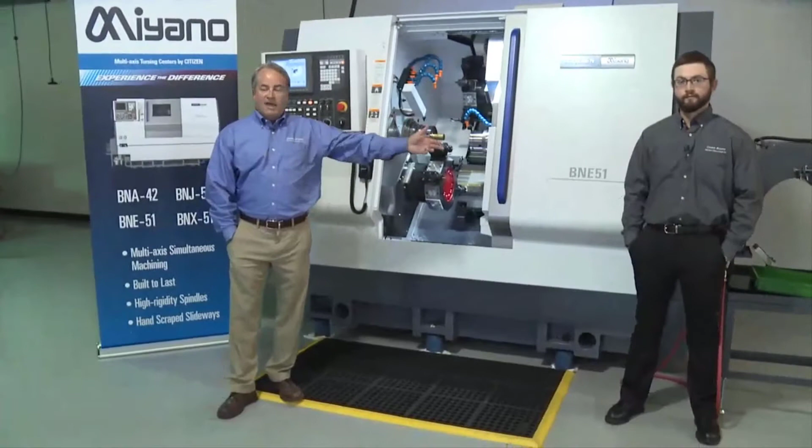Zach Hughes, I've been with the company for 23 years, started out in engineering and been in sales for the last 9. Zach is one of our Miyano applications engineers. So we'll be presenting Citizen Machinery's Miyano BNE 51 MSY.

Again, we want to thank you for taking the time to watch this presentation, and hopefully at the end you'll have a few questions. A little bit about how this presentation is going to go: I'm going to start out going over some design and construction and some of the specifications of the machine, and then I'm going to hand it over to Zach. He's going to get into a little bit more detail on capability and a few control features that we think sets us apart from others. And then after that, we'll actually show Zach's part running. It's actually going to be a narrated video, so we can hear him talk without hearing a machine cutting behind you, and then he'll narrate that as we go, and some other little narrated videos.

I'd like to start out by saying that Miyano has done a really good job of coming up with some unique designs, and many of those are around what we call superimposition. In this particular machine, it's a double turret machine, but it actually approaches the capability of a triple turret machine. That's due to the superimposition capability and some unique tool holders. John, if you can zoom in on this, you'll see a double turning holder. I can actually have 2 operations happening simultaneously with this particular tool holder in this turret. I can program this side to do its own turn, this side to do its own turn, but this side here will actually follow—the subspindle cutting will follow the movement of what's happening with the turret on the main side.

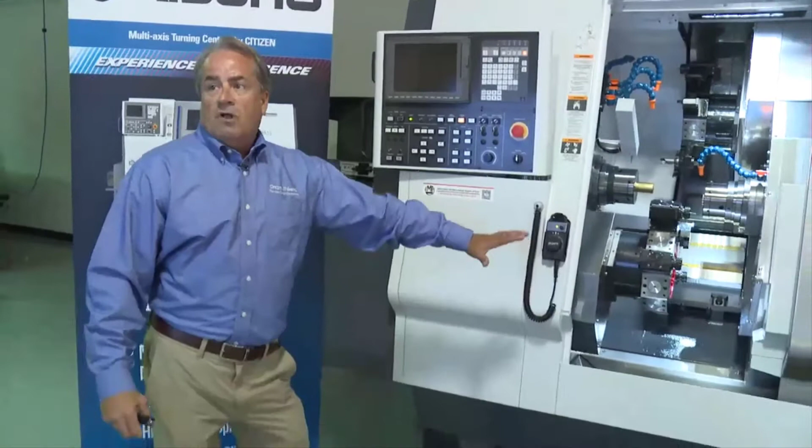So a little bit about the machine itself. It is a compact machine for a 2-inch machine. It basically weighs in at just under 18,000 pounds. And again, all the slides are all hand scraped ways.

The turrets themselves are all tang drive. So I've essentially got tang drive, meaning that if I turn on one tool, that's the only tool that rotates. It's not the whole turret.

On the turrets themselves, as far as live tools, I've got 6,000 RPM on the live tools standard, and we can add to that as well, with speeders and NSKs and that sort of thing. So there's many types of different tooling configurations on that.

Digging a little more into the turrets, or the machine design itself, I've actually got 3 coolant pumps on this machine. 2 of them are flood pumps, and 1 of them is a medium pressure pump that's 138 PSI. Now that we're on that, we can add our high pressure coolant systems, which are single filter or double filter—they'll automatically switch between filters while you're running, and those are capable of 1,000 PSI.

The turrets on these machines are capable of 1,000 PSI through the turret. Both spindles have C-axis, and it's a direct index of the C-axis, so I don't have to worry about slowing things down and it finding C. It'll automatically go to C0.

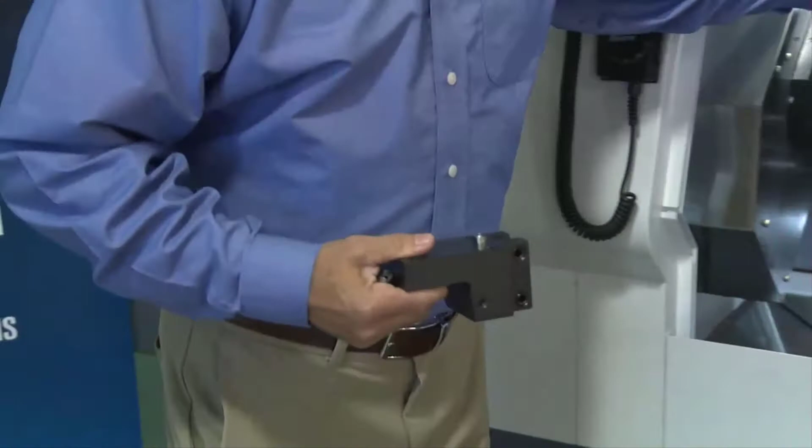One other thing I want to comment on as far as accuracy of the machine and just being able to change tool holders out, this is just a turning holder I've got in my hand, and the fit tolerance between these pins and these bores that these locate on are so tight that you can rely on being able to take the tool holder out, put it back in the machine, and not have to dial it in. It'll be there day in and day out. That's something that's been around on Miyano for years.

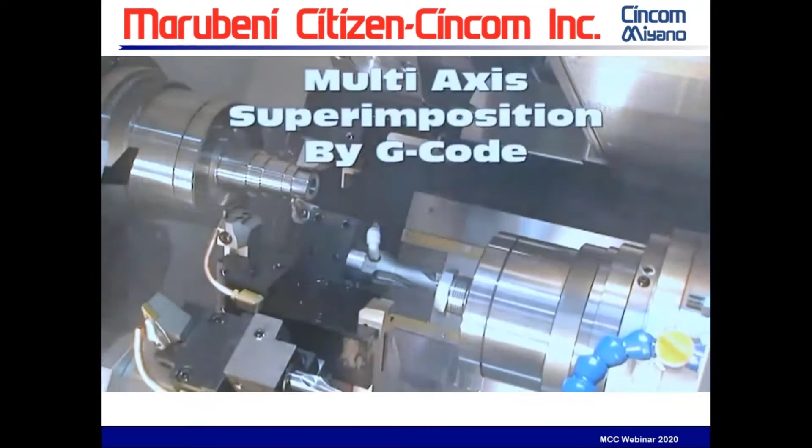So here we're going to be grooving on the main spindle. Right now the sub is just following, it's not doing anything. It's just getting ready to finish this face on the back side.

So we don't gain full triple turret capability, but a lot of times we can save quite a bit of time by finishing on the back side at the same time.

So here again, you're going to see us boring with the upper turret, finish turning on the main spindle with the lower turret, and finish boring on the ID with the back side of the lower turret on the sub spindle.

So here, this is really going to set us apart in the industry, is we're actually going to be turning on the upper turret or grooving, and then we're going to be threading on the main spindle with that turret, and on the back side we're going to be threading simultaneously. So the sub spindle is actually following the turret and keeping up with the threading cycle on the back side as it's independently threading on the main spindle.

So we're not just limited to superimposition with the lower turret, this is going to be showing superimposition with the upper turret at the same time. So now the upper turret is going to be drilling on the main spindle, it's going to be turning on the sub spindle, and then the lower turret is going to be doing its own thing as it's turning on the main spindle.

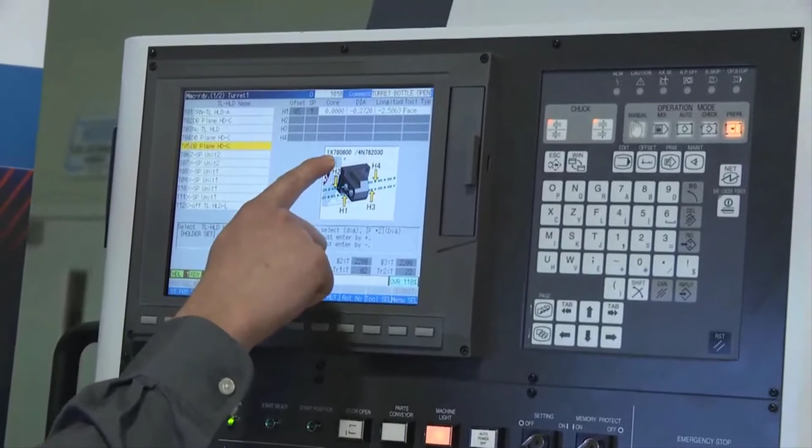So this is actually our holder set page, where we define the holders. This allows us to just call up the holder, and every holder is serialized if you're confused on which serial number there is. It's actually engraved in the side of the holder if it's from Miyano.

So here we can call up the holder, and for the diameter, normally on most machines you have to put in a dimension from the turret to the center line of the holder. This actually wastes a lot of time. Normally people have that number written down, but you still have to put the information in.

Instead, we can just call the holder up, and when this is 0, that means this pocket is on center line to the main spindle. So that makes it very easy. It's just kind of an ease-of-use thing.

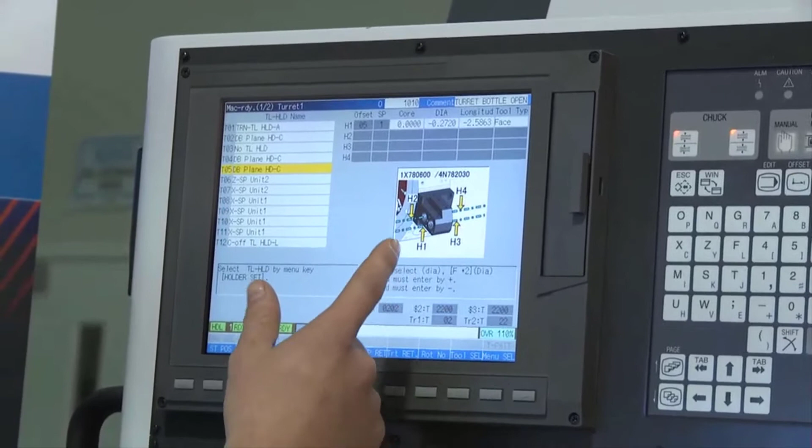This actually has a number in it because that's a boring bar. So in a boring bar, we can just put the F dimension in, the dimension from center line to the tip, and then we're pretty much ready to go. There's really no touching off in diameter here. Then we just have to touch longitude off, which is Z, and that makes it very easy and quick for setup and touching tools off.

So all this information is actually saved in the program in the end. Instead of saving it just here and having to change it every time, we save it back to the program, and this is all output with one program.

So when we want to reload this job, for example, if we have an obligation like 10,000 parts a year, and we don't want to run all those parts at once, we just want to fill in when we're not busy, if you have the resources, you can take those holders, put them aside on a cart, and do other jobs in between that you need to get done. Then when you're slow and want to run that job again, all you need to do is bolt the holders in, put the pads in, and then recall the program.

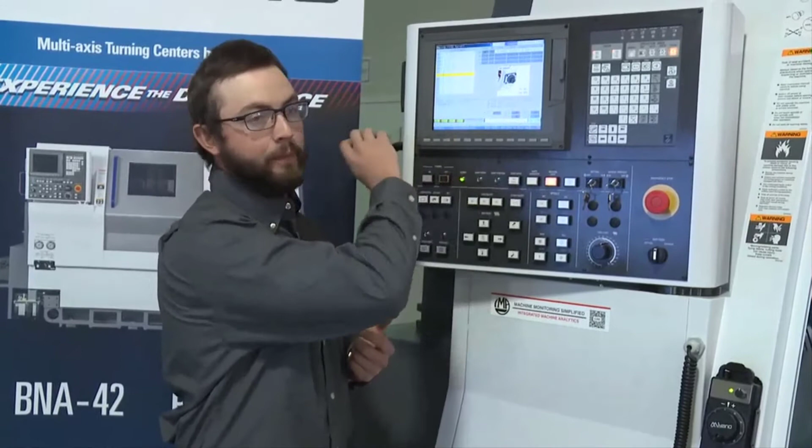It's going to ask you, do you want to load this information back into the machine? When you hit yes, it pulls all the information from your program and puts it back into the machine, and you're basically ready to go. You don't have to touch anything off. There's no messing around with it. You may have to change a couple offsets, but that's after you run the first part. So it's pretty easy, and our changeover time is very, very low when you do something like that.

So a couple features here. We have a check mode. Auto mode is for running automatically, and check mode is for when we're setting up. There's a couple extra features we get here in check mode.

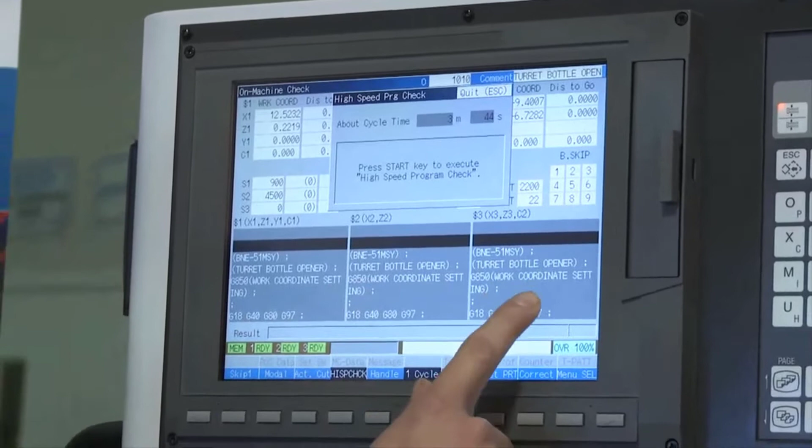One of them is high-speed check. So say you want to get a cycle time for the part for a customer, you can write the program in here and do high-speed check. This checks two things: it makes sure there are no errors in the program, and it gives you a cycle time. When we hit high-speed check and hit cycle start, the machine runs through the program. It's not actually moving, but it's running through to make sure there are no errors, very quickly. In the end, it gives us a cycle time, which is pretty accurate within about 10%.

So this is definitely a time saver. It makes it very easy and reduces the errors in the program as you go.

There's also another nice feature when you actually go to prove it out. We have this handle mode. What handle mode allows us to do is once we turn it on and hit cycle start, the machine is going to start to run. We can go over to our handle and actually go forward. The second that I stop, this is running through the program, but when I stop, the machine stops.

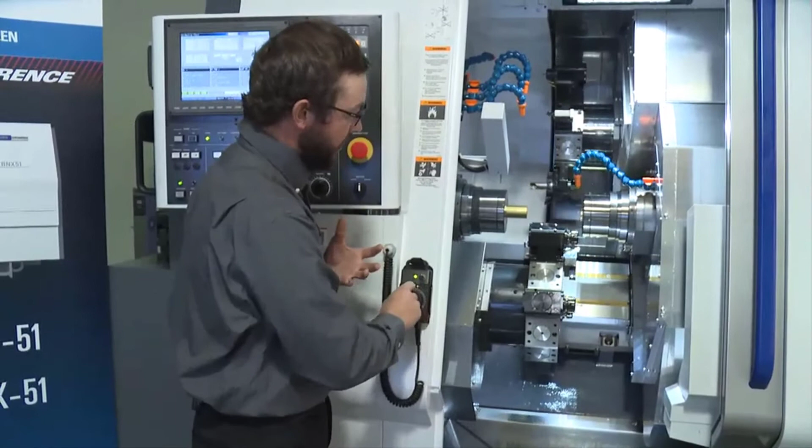So we can continue to run, and everything's going to start. It's going to go down like it's going to machine. Say that it was too close and I wanted to go back a little bit, I can go back to an extent, so I can actually go backwards a little and rewind. Then I can go down and start to machine. This is very easy, and it makes it very easy to set up and prove out a part.

So some of the things I want to talk about is MC data. MC data allows us to save the information of the part in here - bar stock diameter, how far we want the part sticking out of the main spindle, how far it is out the sub. So we actually don't have to use a G54/56. The machine actually knows where the part is in the machine at all times, and again, this is saved in the program.

So if you notice in the video, when our tool changes, when it goes to do a tool change, both the sub spindle backs up just far enough, and then the turret backs up far enough so that we can change tools right off the part, because it knows the longest tool in the turret, so it can instantly rotate and clear the part and not hit anything. So our chip-to-chip time is almost nothing on this machine. It's very, very limited, and that's another thing that really sets us apart.

So I kind of hit on all the details of the machine. We're going to jump to questions and answers, and I'm actually going to bring Les back into this for that.

So Zach, we've got a question. Somebody's asking whether or not the top turret has the Y-axis on it. That is the only turret that has the Y-axis on this machine, and I've got 80 millimeters, or 3.2 inches, worth of stroke on that Y-axis.

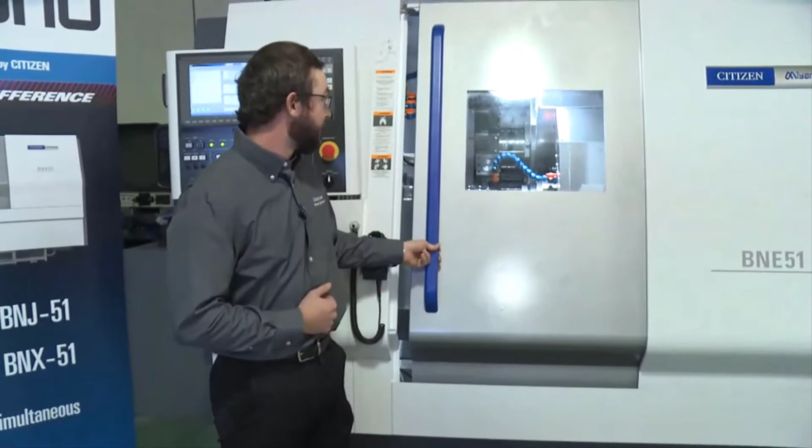One thing I want to hit on real quick is Les mentioned our coolant capability. I'm going to close this, and I'm going to show you the standard coolant that comes with the machine besides the 1000 PSI option.

So you can see here the standard coolant, and it's kind of hard to see the high pressure coolant here because it's covered up and splashing the glass now. But we don't have any issues with coolant right from the factory. I know that sometimes that's an issue with machines, so I just wanted to hit on that real quick.

Any other questions? All set?

I guess there's another question where somebody's asking whether or not this is the single, double, or triple turret machine. So essentially, this being the double turret machine we talked about, some of these other machines are single turret machines, and there are triple turret machines that are special ordered from Japan, 2-inch and 2.5-inch machines, but those are a little longer lead time at this point. And those triple turret machines have triple Y-axis on all the turrets.

Hi, my name's Dave Doobie, and I'm with Marubeni Citizen-Cincom. I am the Electrical Engineering Manager for the Automation Department, and we are here to talk about the BR200V Vacuum Ejection and Palletizing System.

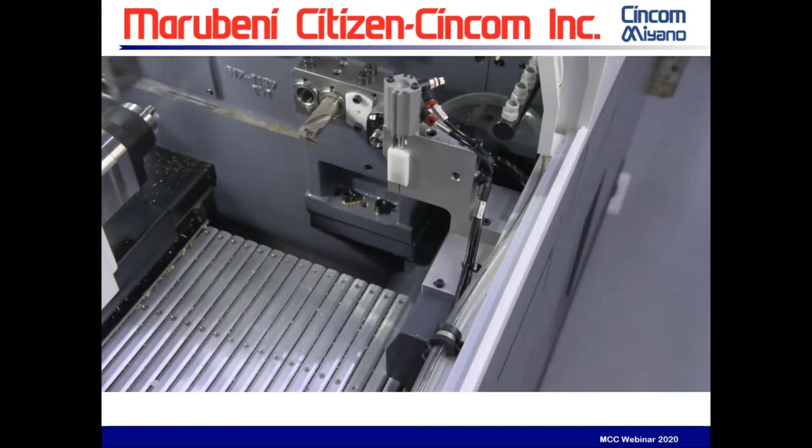Our machines are capable of making very small parts that sometimes can be lost in the normal ejection system of the machine. The vacuum systems are capable of ejecting every single part made on the machine without being lost.

There is zero cycle time once the part is ejected from the subspindle into the system. The part deceleration funnel is used to decelerate the part as it's ejected from the machine, so there is no part damage to the finished part.

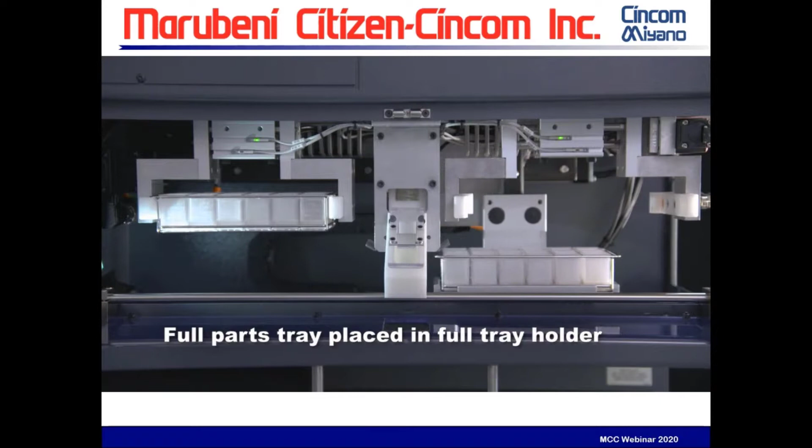Two trays in the system provide an exorbitant amount of unattended runtime for your machine.

Random sample feature allows parts to be removed from the system so they can be measured for machine verification.

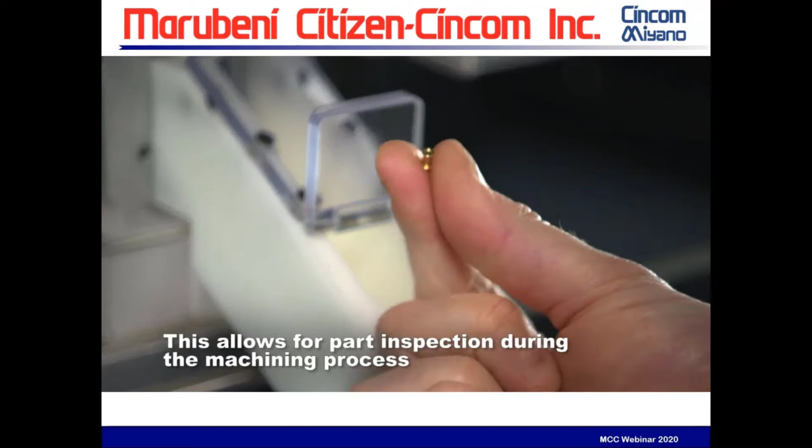There are different types of tray designs available throughout the system so that you can have SPC control and/or straight running capability. The L12 vacuum system was designed to capture all small parts made in the machine. The same concept and system can be designed and used on other various machines in the Citizen line.

Now we're going to talk about the K16 bone screw unloading and palletizing system. As the screws are unloaded from the K16, there are different types of screws that can be made. Depending on the head style of the screw, different options and modes can be selected to unload it. The modes available for ejecting screws would be a direct grip from the subspindle or the unloading feature, which grips the screw in a place where it is stable.

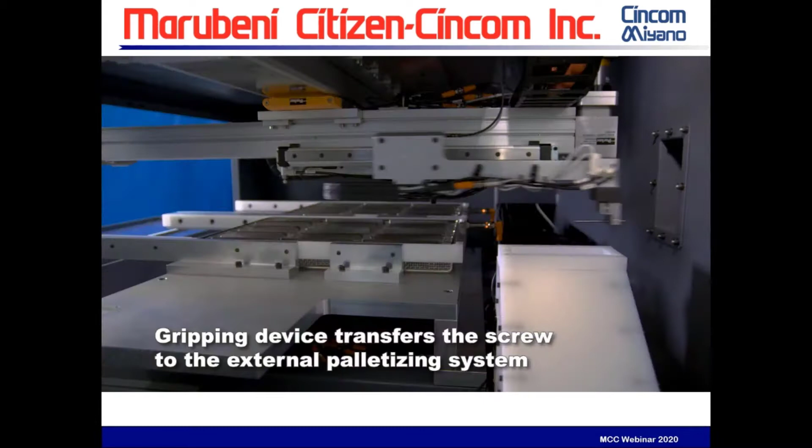There is no added cycle time to the machine from this point on as the screw is unloaded. These bins are designed with sample bins and run bins. The sample bins will contain a single part which during inspection can be measured, one on either side of the run bin, to determine that the screw is within spec. If the screw is within spec on either side, then all parts in the run bin are good. Our random sample feature, provided on all automation systems, is capable of unloading a single part to the exterior of the unloading system so it can be measured and verified.

Trays can be removed temporarily from the system and replaced without losing sequence in the tray.

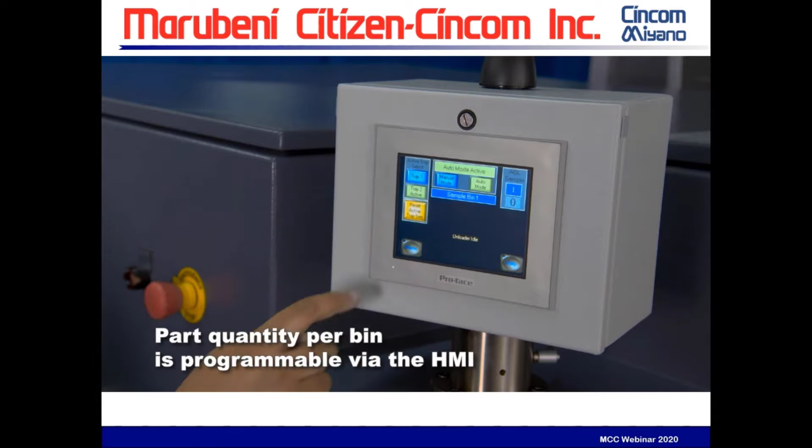The K16 bone screw unloading system was designed to unload a multitude of different style bone screws from the machine to prevent any kind of damage to the parts, and it also allows for SPC control during inspection.

What are we doing next? We're going to talk about the L220 blank loading system on our new L220. This system was designed to help feed the U60J option on your L220.

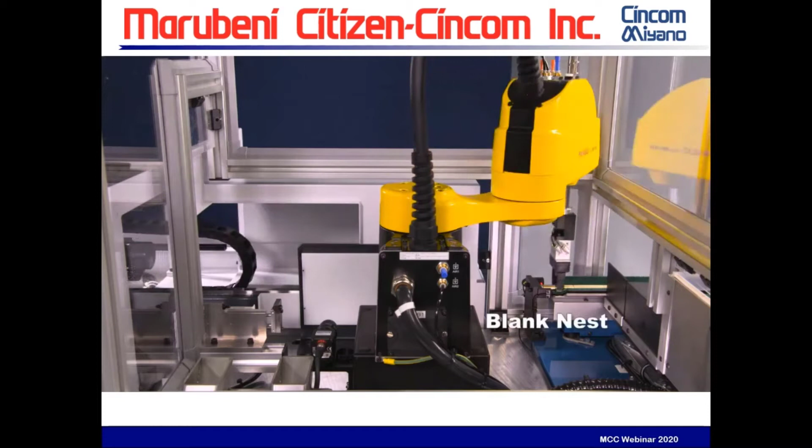The system contains a bulk hopper for your blanks, which deposits parts as needed onto the vibratory table. The parts are circulated around to be deposited down the feed track. Parts can be brought into the feed track in different orientations. Here you'll see an overall operation of the system and the way it actually works. Next, you will see a detailed description of each individual move of the system.

You can see here when the vision system takes the picture, it knows the part was oriented incorrectly. It rotates the part and places it into the qualification station. Once it puts it in the qualification station, the robot grippers rotate back to the same position every time when it loads it into the U60J.

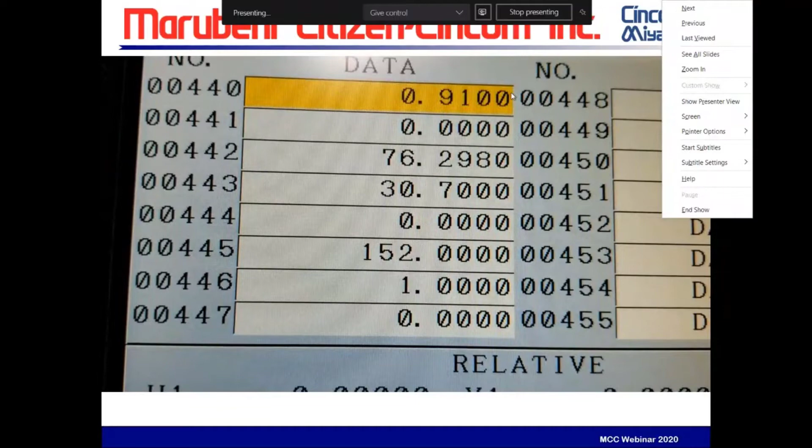Now with this type of information being sent through the program, if the operator or the setup person forgets to send the bar loader info, the information will be sent by program. We are also working on having this information of parts remaining and pusher positioning showing up on our operator screen.

Another new feature that we'd like to add to our bar loaders is a last bar sensor. So if the lid is closed and the machine is in automatic and the last bar is loaded into the channel, now with the lid still being closed, we have a warning light blinking that states that there are no more bars left in the bar loader.

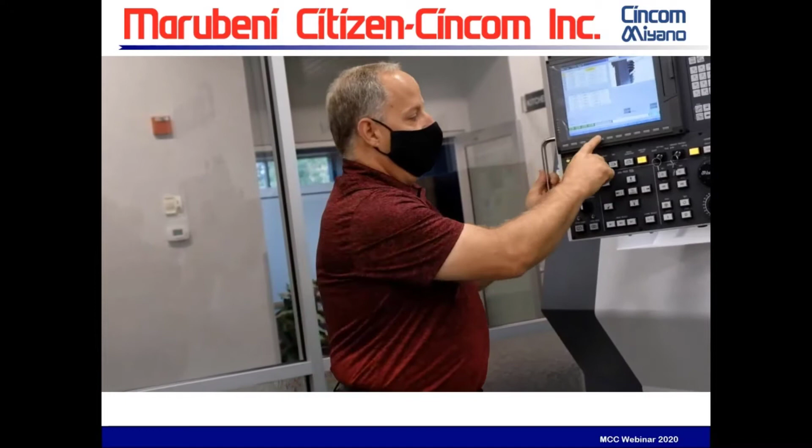But we've always had a really strong emphasis in local service to do our absolute best to make sure the customer gets up and running as fast as possible. Our training group provides training almost every day for Haas-related machines. We also do on-site training for our customers as well. That's extremely important. People need to know how that machine tool works, not just what it can do.

We also have a used equipment division that will identify equipment that's old in a customer's location. We'll tag it, look it over, and in many cases, somewhere in the United States when this goes on an auction, we'll pay much, much more than anyone ever expected they would get by just having a local auction.

We also have a group that provides tooling accessories. They are outside salespeople who are really dedicated to helping customers figure out ways to produce a part faster and better. We also do preventive maintenance. It's a lot cheaper to have your machine brought down to have it maintained on a regular basis than to have a problem and then have it down on an unscheduled basis.

Our success is really what we see in our customers' success. When people think about productivity, hopefully they think about us as being fair. We provide excellent machine tools and services. What we also provide is quality service, integrity, and being the best we can for our customers.

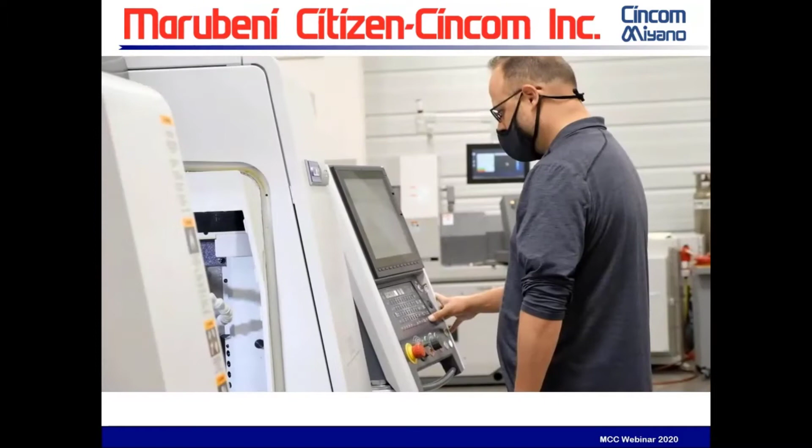The five gentlemen seen here are just part of our applications engineering team that is focused on turning, multitask machining, and Swiss-style turning. Combined with our staff in Cedar Rapids, Iowa, and Omaha, Nebraska, collectively they have over 150 years of experience in manufacturing. Whether you lack internal expertise, time, and manpower, want greater accountability, or just don't know where to start, outsourcing your CNC engineering project to Productivity will help you solve your toughest manufacturing challenges. They are here to help you get the best of your investment in your Cincom or Miyano machine.

All right, well let's get to the machine here, the Miyano BNA42 GTY. This machine is built from the ground up as a bar feed machine to handle the specific requirements of a bar feed machine. Bar feed machines need to be extremely rigid to handle vibrations that might be transferred through the bar rotating at high RPM, and they need to be really thermally stable so that, doing high production over long periods of time on parts that require extreme high precision.

Well, let's look at the bed. The bed is the foundation of the machine, and we all know the foundation has to be solid. The design on the BNA42 GTY is single piece, heavily ribbed cast iron. This bed provides for high accuracy over many years of use. It also provides for thermal stability and vibration dampening.

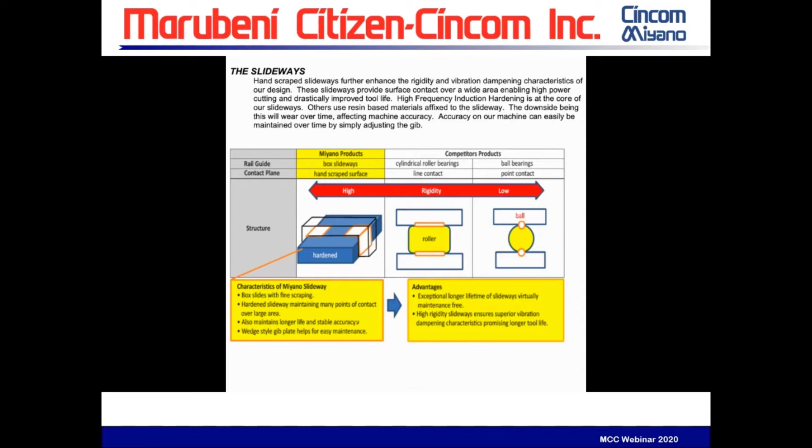Let's take a look at the slideway system on this machine. The BNA42 GTY uses hand-scraped box way construction. Again, this gives us higher rigidity and better vibration dampening than other way type systems. A lot of competitors use roller guideways or ball guideways, and they just don't offer that same level of rigidity and vibration dampening. Both of those things, vibration dampening and higher rigidity, will provide much better tool life over long periods of time as well.

Next, we'll look at the spindle. The spindle is really the heart of the machine, and the Miyano spindle design is unique and extremely well built for bar feed applications. They have double row cylindrical roller bearings in the front for rigidity, angular contact bearings for precision, and 2 sets of double row cylindrical bearings in the rear for added rigidity. The spindle also has a very thick walled construction, which again just assists in heavy duty cutting and vibration dampening.

This brings us to the control. The control is the Mitsubishi M730VS, and this is really the difference maker on the BNA 42 GTY. This control uses all of the technology that Cincom has developed over the years for faster setups, fewer errors by your operator, superimposition cutting where we're doing simultaneous operations, still using very easy programming technology. So if you have not seen a demo on this control, I urge you to contact your local dealer and get a demo on this control. It really is the difference maker.

So when you put those basic design features together with the tool layout on the GTY, you come up with a machine that is simply outstanding for bar feeding work under 1 5/8 inch. We have the gang slide that has both turning tools and live tools, which allows for pinch turning or pinch milling in conjunction with the turret. And then you have the tools on the gang slide that face the rear, so we can be working the rear side at the same time as we're working the front side with the turret, and the turret can work both the front and the rear. So a lot of capability here, a lot of flexibility. It all comes down to simply making your parts faster because of the overlap simultaneous operations.

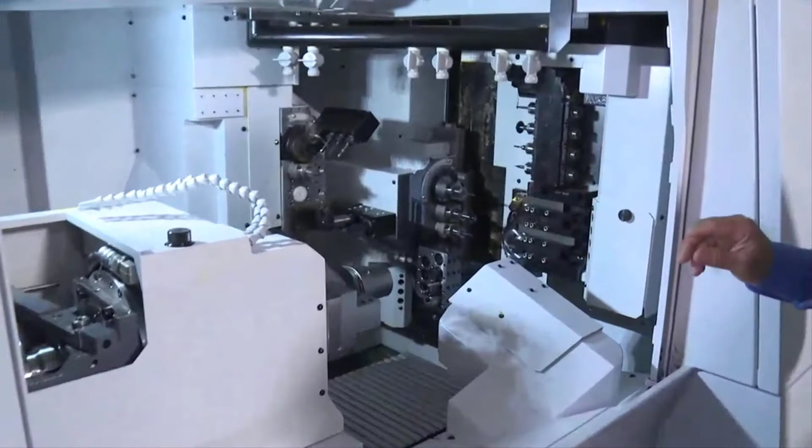What you essentially see inside this machine is a standard tooling package. The B-axis, the assortment of turning tools, this is all standard. These are live cross drills here, and those live cross drills are all integral spindles. I can pull them out. For instance, this cross drill here, which is standard on the back side, is also the same spindle that I use here. So what you see here is a standard machine.

You get a static holder here, a 3-position holder. A lot of these holders are all 3-position, whether they're static or other types of live. This particular one is also standard, and it's actually able to rotate. Right now Jimmy's got it on an angle, but it can rotate from 0 to 90 degrees. That's a manual adjustment, whereas this B-axis is fully programmable.

So I really have 5-axis simultaneous control on this machine. If I'm dealing with complex machining with the B-axis, I can generate code for 5-axis simultaneous. I think that's pretty much what I have, and I'm going to hand it over to Jimmy. He's going to get into a little more detail, and we'll have questions and answers after we're done.

Thank you, Les. My name's Jim Kuchansky. I go by Jimmy K here in the New England office. So if you ever call in, ask for me. The Kuchansky last name gets confused with a lot of other names over the intercom system, so I finally go by Jimmy K here. Everybody knows who they're talking to.

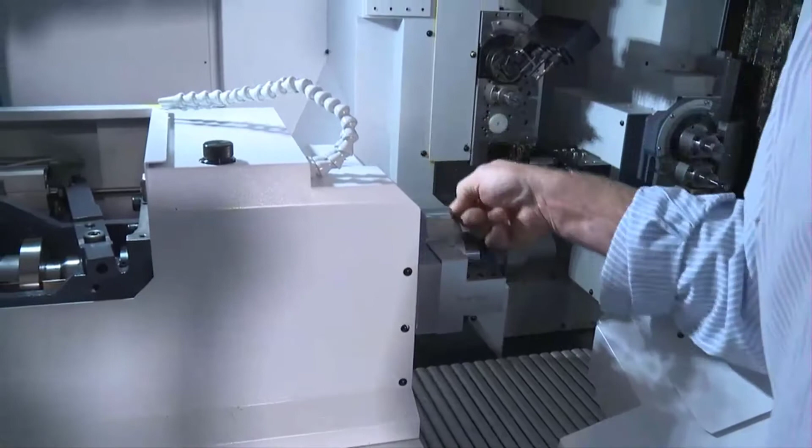So on the back side now, I've covered all these: we have our Z3 axis, we have our X3 axis, we have our Y3 axis, and we also have C2, which is fully programmable through milling interpolation. We can tie it in with our B-axis, so we have the ability to 5-axis machine on the front side, true 5-axis. We can also swing this holder to the back side and use true 5-axis on the back side as well.

What Citizen does awesome is they have modal commands. Many of you that work on FANUC controls may have head 1, head 2, head 3, and you have to teach where everything is. On the Citizen machine, we use what we call, on this particular machine, our G700 codes. That gives me information as to where I am actually machining—am I using both gangs on the front side, am I using the sub spindle with both gangs on the front side?

Am I using the B axis with the sub spindle? Am I using it on the main spindle? Or am I using the sub spindle over on the back working tools? With all that being said, the limitation really is here in your head on how to process parts on this machine. But the machine can pretty much do anything we ask it to do.

The front side here, these two ID blocks, one lower, one upper, those are now standard coolant through. We have worked with tooling manufacturers to allow us to use their tooling, so the blocks are slotted. Through their holders on the back side, we can put the tool holders in, and high pressure coolant comes down below here, and we're pumping to the block. So we don't have the interference of all the lines in the machine that are another area for chip contamination, catch, chip wrap, those kind of things. And that is on both front and right side and left side blocks.

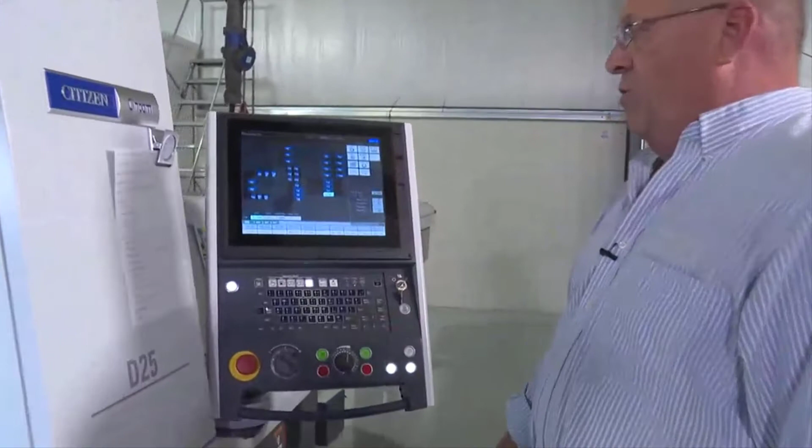One of the things that's unique on this machine, and if you were here a little earlier, you probably saw a little bit on the cab bar feed. The cab bar feed is a bar feed that's completely electronically linked to the machine. There is no separate control on it. So everything we do from the machine is controlling that bar feed. Right off my screen, I can menu select, and I can have bar loader operation. The bar loader operation, I can step by step through the entire loading process, open pushers, drop bars in, any of those kind of things.

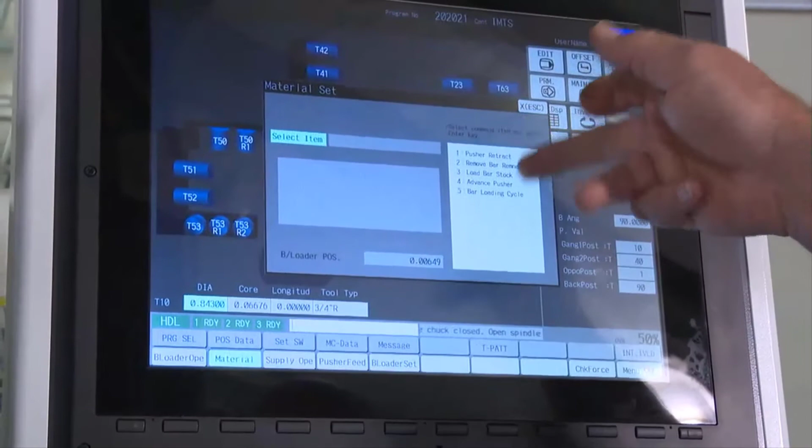Material, if I choose to, automatically, if I have a bar remnant there, I want to get it out of the machine, I just select number 2, it retracts the remnant. I can load bar stock. I can just bring the pusher forward. Or if I have a bar sitting there and I need to get up to our top cut position, which is right behind the guide bushing, what that does for me is I can go through the entire cycle. It will go back, strip the remnant, check for no bar, drop the new bar in, and bring it forward to what I would do during normal bar change. So that's an awesome thing about the material.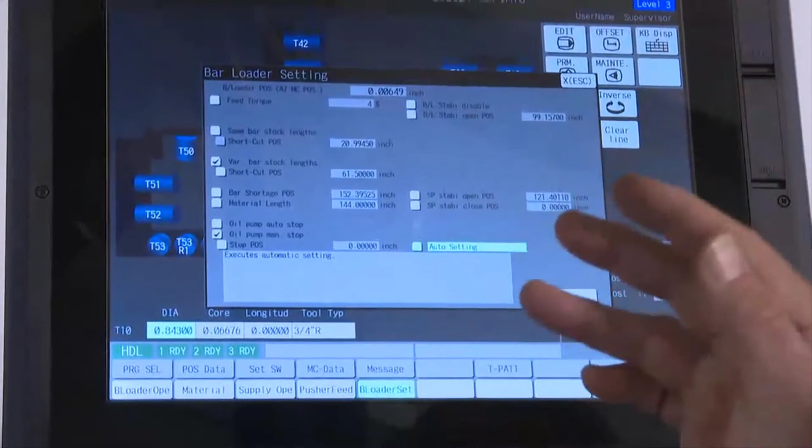And then we have our bar loader set page. I'm going to show you the MC data page shortly, but this information here, we have different positions of the bar feed that optimize the stabilization of the bar. So what this does is, based on information I give the machine with every program, it automatically recalculates all the things here. We run various bar stock lengths because we have a flag in the front of the machine. So we can run any length bar, the flag is tripped, and then we measure to the back of our guide bushing and then load bars. So if we're running random bar lengths anywhere from probably 3 feet minimum to 12-foot bars, we don't have to worry about where that is because we measure from the front to the guide bushing.

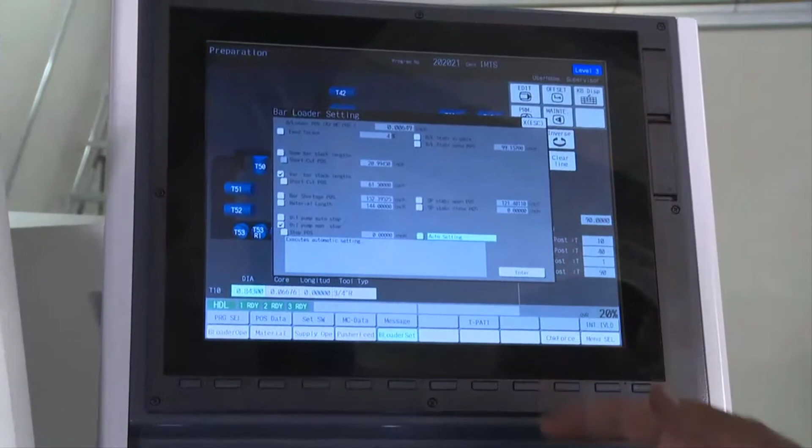So bar shortage position is automatically calculated based on my part length through this auto setting feature here. So if I have a 6-inch part, we have educated the machine on where max feed is. So all I have to do is hit enter here, and it recalculates all my stabilizer positions, all my end of bar positions, all that stuff is done for me. So it's very easy, and all that information I'll show you shortly comes in with every program we load.

So again, I just want to reemphasize what Citizen does. Instead of head 1, head 2, head 3, we put in a $3 sign program on this particular machine. We have 3 Z-axis, we get $3 signs. So what that means is when I look at a program, we see head 1, head 2, head 3 on the screen, but it is all one unique program. All that information, we don't have to load 3 different programs for any process we're doing.

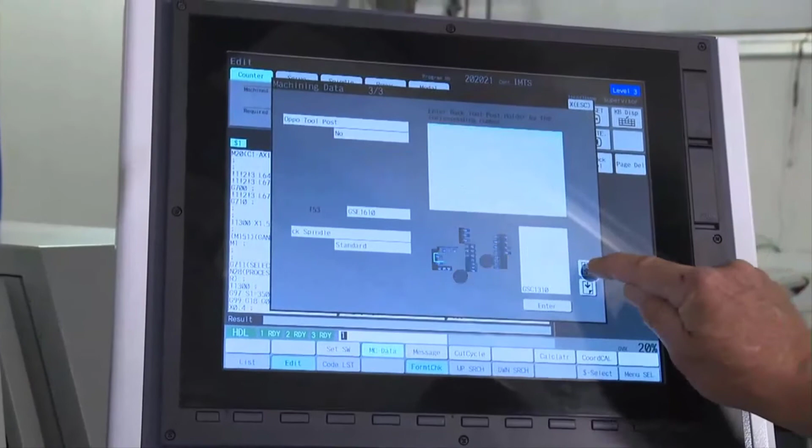This information is all inherent to the program that comes in. Along with that program, we have an MC data page. So basically what we describe is our stock, how far do we want to index, what tool we're using for cutoff. Automatic cutoff speed, program speed is completely different, that's whatever we choose to do. How much material do I need for the part? Do I have an extended nose collet? What's my work sticking out of the sub spindle and the extended nose collet? What's my diameter to actually set the tools from the backside? And what is my actual part length? So that works as a counter for the bar loader, so we know how many pieces are left on the bar. That information, every time we download or upload a program, is called in and sent out with the program.

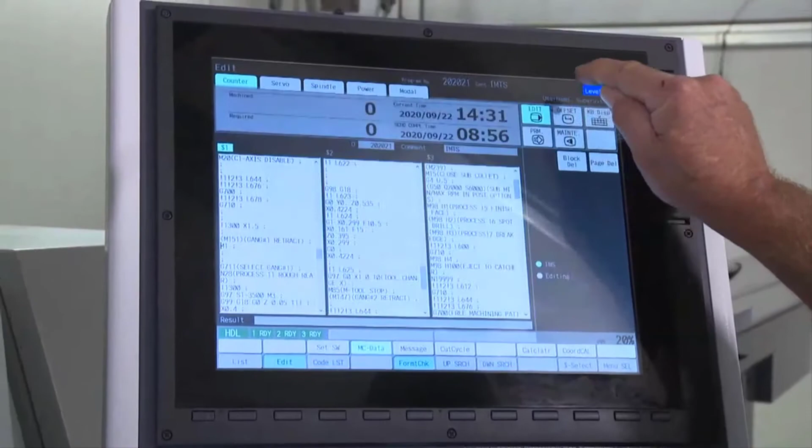Tremendous help. So we don't need to keep teaching tools every time we put in, we have the information in the program. What Citizen does with the tool setting on this machine, based on that information, we have what's called a preparation mode.

In preparation mode, all the tool pockets are taught 0 right in the beginning, so we know where everything is. In the prep mode, what it allows me to do is fine tune for tool thickness. Maybe we have an F dimension on a boring bar, or maybe we're running a knurl, which you'll see here on the backside, where we have to go way off center with it for 0 point. So we have specific tool setting.

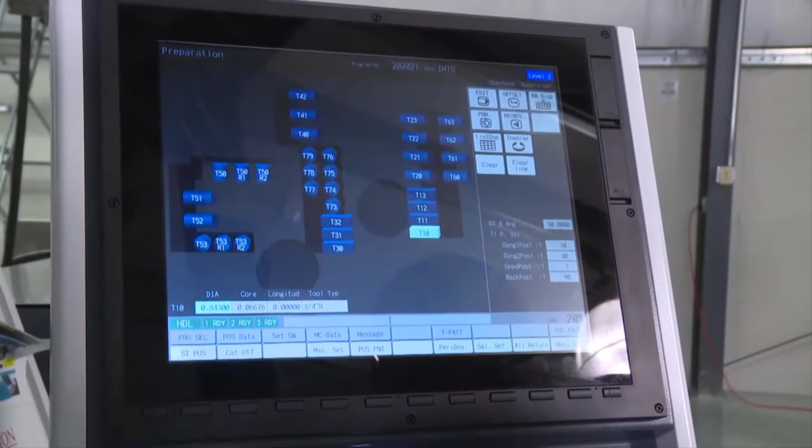So in the case of any of these tools, what we have here is a manual set. It describes the diameter. So if we want to set diameter, we're using, in this case, the 3/8 stock we put in the machine. That's our OD, a known diameter. We put the tool in, we set it there. So now it's good for any other diameter. We can change diameters of material and not have to retouch that tool. We also have the center coordinate if we need it, so the centering allows us to establish top dead center on all our turning tools.

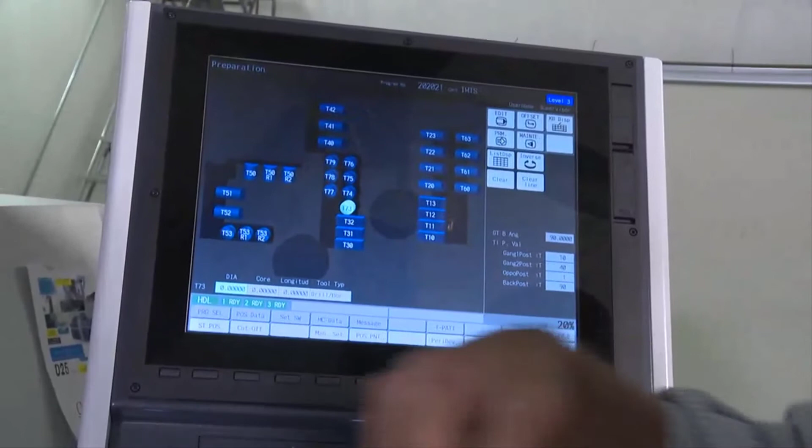When we go to any of our ID tools, we have core, diameter, and longitude. That's the center of each pocket. We teach that on setup for calibration. So again, it allows you, if you have a diameter adjustment where you have a boring bar with an F dimension, and you don't want to G50 shift it, you can actually put that value in there. For many of you that don't work with G50s, it's actually like a tool setup data page. So we can accommodate stuff there. If we have something off center, we can do that. And we also set our length on any of the tools there.

So one more thing on the MC data page I'd like to emphasize is on the first page where that information goes in. I quickly jumped over it, but we have our back chuck extended length. If I cursor down to that, it actually shows you a picture. That's if we're running an extended nose collet, so we could put in the value of the collet. The machine does all the recalculation for us. The back work length, that's how far from that extension the part is actually sticking out from that collet.

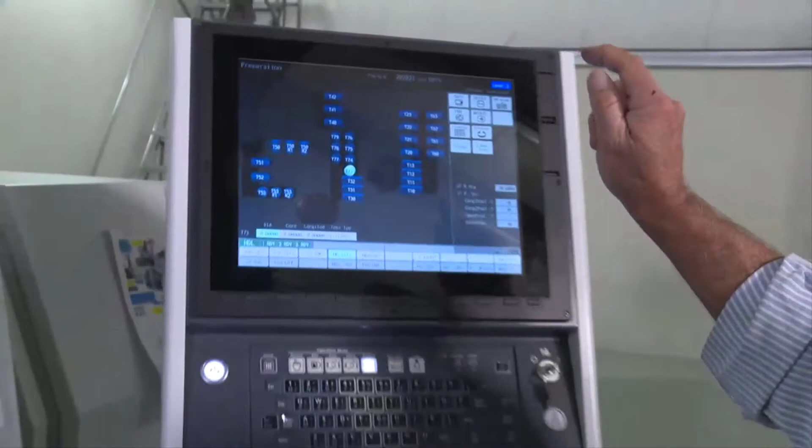In the manual mode, I mentioned I'd come back to this quickly after I talked about the axes. On the axes, it shows you all the machine axes through our manual mode, $1, $2, $3. So $1, again, X1, Z1, Y1, B1, X2, Z2, Y2, X3, Z3, Y3, and A7 is actually a servo axis. So our bar loader stays exactly synchronized to our Z1 axis when it moves. Everything is electronic, servo motor, just like anything you do with pinch turning, it's that accurate. The only two axes that aren't shown here for the manual mode are C1 axis, which is our full C axis on the main spindle, and C2 axis, which is our full C axis on the sub spindle.

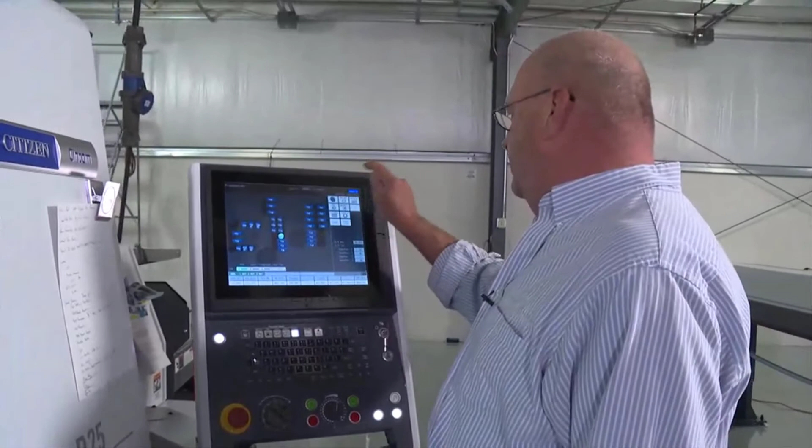One of the unique things about Citizen code internal to my programs is they all stay together. If you're working with a Fanuc control, or even some of the other controls, not necessarily Mitsubishi with Citizen on top, we have the use of sub-programs. Instead of doing an M98P1234 and going out to find it, we use M98H1 to search for sub-program N1, M98H2 for N2, etc. We can do that in all three $ signs, meaning we load one main program that covers all the machining area, and we load the sub-programs with that program, so we don't have to load 8, 9, 10, 12 programs. We load one program.

We also have the ability to run from a card if we have an exorbitant amount of B-axis work, a huge amount of memory. That's all done through a post processor. If we have 5 axis on a line, we could have 1,000 lines, which would take up a tremendous amount of memory. We can actually run that as an external card, so we don't have to take up all our internal memory space.

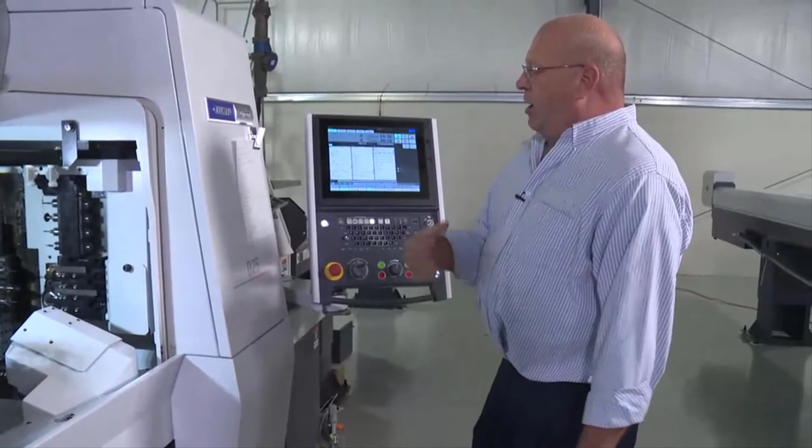Now a couple of the extra features on the machine: we have what is called our preparation mode, and then we move into program check mode. In program check mode, what the machine gives us, if we look at the control here, we have 1 block, 1 cycle, handle, and high-speed check.

I'm shutting off the bar loader right now because I'm not using it. I'm going to turn on high-speed check, and this allows me to test the cycle to see about what the cycle time is, and make sure there's no blatant errors, any of that kind of stuff. So when I hit cycle start here...

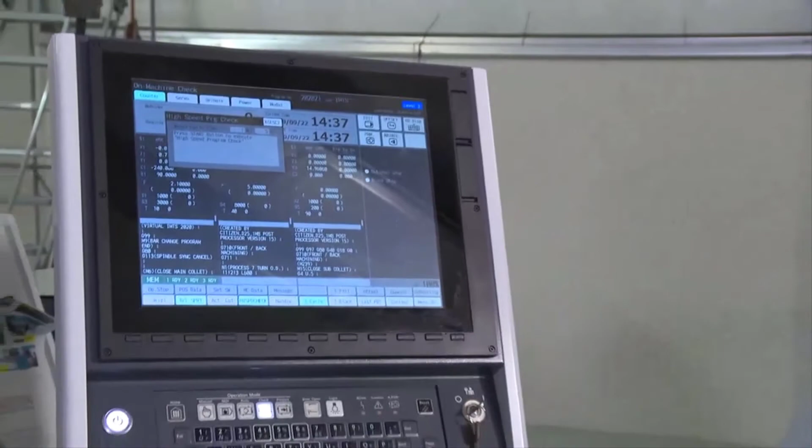You can see all 3 $ running simultaneously. They're all working together, utilizing our 700 series modal commands to tell the machine how I'm working. Cycle time came out at 1 minute and 5 seconds. It's a pretty accurate cycle time, plus or minus 5%, maybe 10% worst case, but I don't have to actually cycle the part to see what I'm doing.

So what I'm going to do right now, so you can see the difference, is run one cycle so you can see the machine run, and then we'll talk a little bit more about that afterwards. Okay, if John will just visualize the machine cabinet.

So you just saw a broken cutoff detector standard. We're doing some standard work, a face operation, normal ID work, pinch turn operation. As you can see, tools are very close there, but plenty of room to get them all in.

Pinch turn, then we're going to go into a pinch milling operation from here. Again, tight proximity, but I have 2 tools that are about 60 thou away from each other. I also have double saws above that if I wanted to pinch saw a long part, and then a back turn.

Grooving operation. It showed the B axis, just the movement, how fast it is. And now we're coming into one of those 700 codes to be able to pick off the part. My subspindle knows exactly where the part is without having to teach it, because of the information in the program and the use of my modal commands.

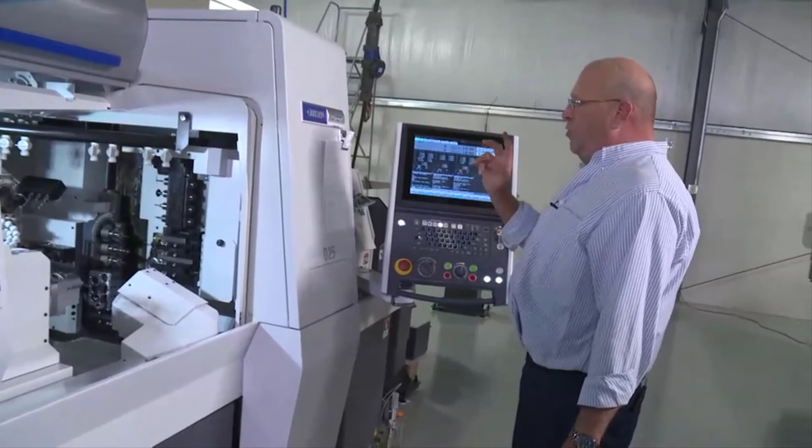Okay, so now back to the control. That was your one cycle in comparison. So what I also have here on the control is when I want to run the cycle and prove it out, I have what's called a handle mode. So when I'm in program check handle mode, when I hit cycle start, it jumps one line, but the machine never actually moves. So what's going to happen now is I have a very slow, a medium, and a faster handle mode.

So while I'm in cycle start, when I start cranking the machine, okay, now John, look back in. I'm just cranking the handle mode now. So I had a little dwell there, so I got to go a little faster here to get off my dwell because the dwell counted in. So as you can see, as I crank through, that's in my very slow mode. I go to times 10 of that. So now the machine will move faster.

Okay, and it's through. So it gives me the opportunity to stop cranking. I can check for clearances, any of those kind of things. Okay, now I can go even a little bit faster because I know this is a good program. I'm not going to waste a lot of time on this, but it is there and available. But I will show you on the pinch stuff how good it is.

So now I'm coming in. That was fast. Okay, but now I can slow it way down and I can look at what's happening. Okay, so now if I see a problem, I have the ability to back out of that code. We go a little further forward. So John, so we can see it over here.

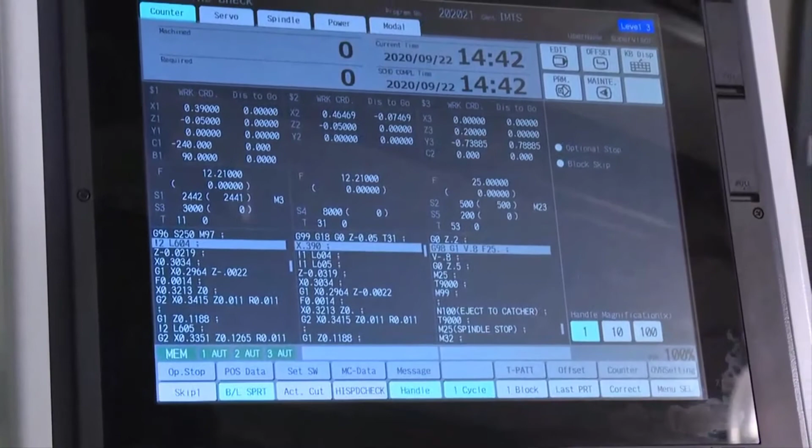The other nice feature is if I have something wrong with the program at this point, I can switch to one block. It'll give me, the machine reads 5, 6 lines ahead. It'll tell me there's an alarm coming up. So if I didn't pick it up during my program check mode, when I did the high-speed check, it'll give me an alarm here. So I'm going to go to one block and let it finish.

Okay, now that's finished. I have a correct feature here. Okay, it's not going to let me correct it right there, so I can continue on. Okay, so now I can go back to one block, let it finish the block. We'll see if I can correct something.

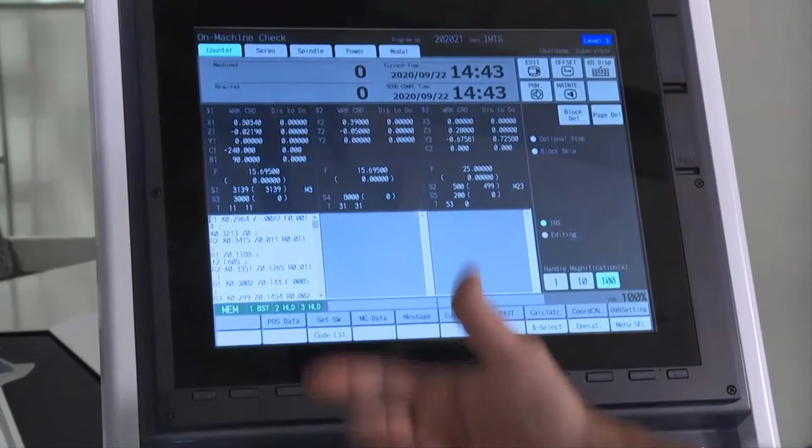So now the error may have been in $1. It's one of the places I can correct it. If I had a typo, a double decimal point, or anything like that, I would be able to correct it, come back to operate on the screen, and continue on. So like now I know the program's good, so I'm just going to let it finish up the cycle.

So pretty much you've seen the cycle run, you've seen how the program works. One last thing I want to show you in the edit mode. If I happen to make a typo when I'm putting the program in, if you're not using a post and you put the code in by hand. So if I come down and I make a mistake, like my finger, I get a stutter finger.

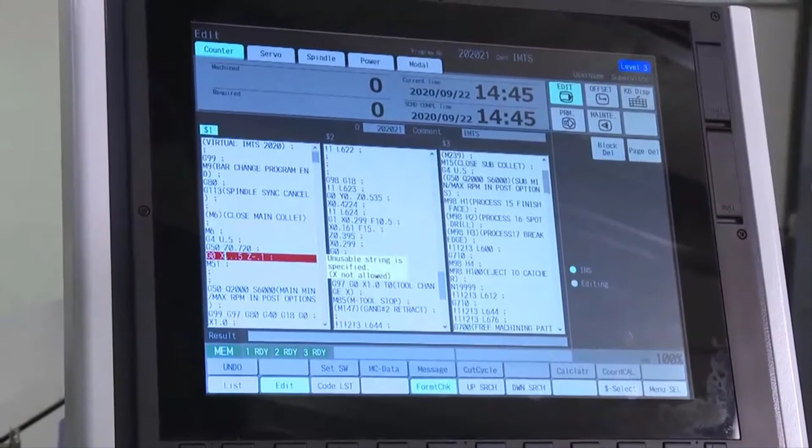When I enter that, I put in multiple decimal points. It came up, said I have multiple decimal points, you got to fix it. So now I can fix it. So now it goes away, and inside the cycle, it would do the same thing if for some reason I missed it during my high-speed check, or I didn't do a high-speed check.

The last thing I just wanted to show on the control is all of us on the older Citizens, we used to have our maintenance parameter button. With the touchscreen control, all the stuff is up here now, so I can select what I want. And then everything I want to do is right here in front of me. Okay, whether it's manual MDI, communication, offsets, tool life, any of the zero execute, variables, structures, what do I have? So it's all here now, right on one page. We don't have to find the page. It's all here for us.

Okay, the last thing I wanted to touch base on, Les mentioned earlier that we have a convertible machine. Right now this machine is set as a guide bushing machine, so that's one option. The second option was to remove the guide bushing, allowing the headstock to travel forward so we can use it in a guide bushingless mode.

So the part's actually chucked, and now we can machine using our same tools on the front with the part chucked. Good length to diameter ratios work out well. If you've got long, thin parts, you want to run sliding headstock. The last option is our adaptive guide bushing.

It's a double taper collet that we put into a system that's pneumatically pressurized. When we close the system, it's pressurized to about 60 PSI. That allows us to run varying bar size material - aluminum, copper, plastics, brass - without having to worry about the size of the bar varying internally. We have plenty more information on this, but it's a great system if you do not want to, or cannot cost-effectively, grind your material. So it's something to keep in mind.

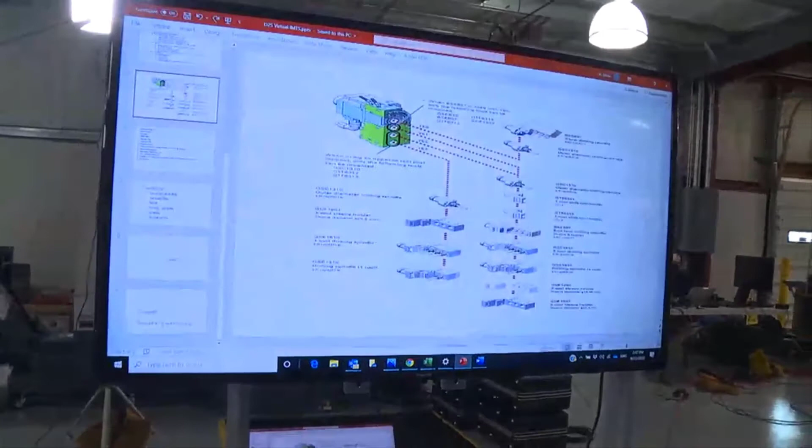All right, so now what we're going to do is have John turn around real quick and face this screen. What we have right here is the back work block I showed you, and Les showed you some of those tools - those are all the tooling capabilities for the positions on the back side. As you can see, there's a tremendous amount of work we can do on the back side with this machine, in addition to the B-axis on the sub spindle.

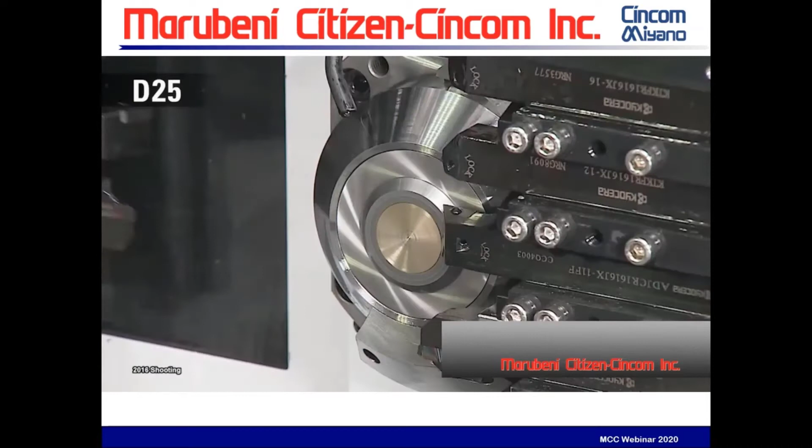Here we've got just showing some separation between the back spindle and the main spindle, doing some drilling on the front, some turning on the back side, and now we're going to get into pinch turning, where the Z2 axis on the left side is going to follow what Z1 is doing, but do its own thing as well.

We've got pinch threading, and we're back to pinch turning.

And then we're going to change tools. We're going to go into pinch grooving, and then we're going to show pinch milling. Even though these flats are directly opposing each other, I could actually produce two different flats in two different places if I wanted to, because of the separate Z-axis on the gang on the left.

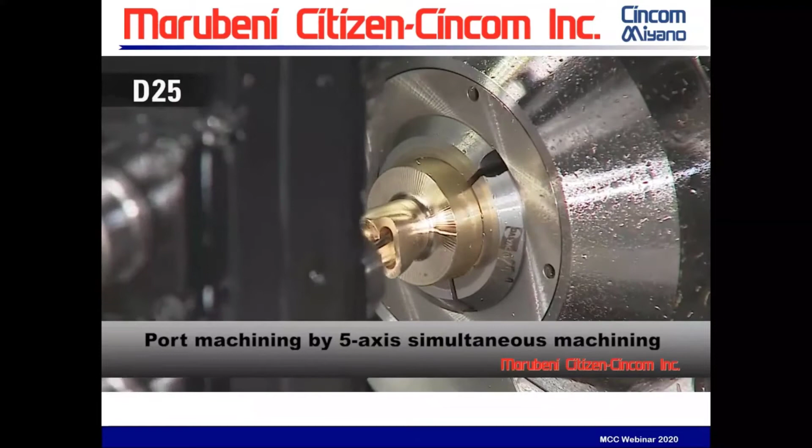And now we're going to 5-axis simultaneous milling, and we're just cutting a port at this point.

And this is showing a little bit of the back work. I've got 4 rows of tools, and I can have 3 tools in each one of those rows, so I can have a total of 12 tools if I wanted to. In this particular case, I've got 8. You can see the top holder that's set up as a cross drill - that tool can be manually rotated 0 to 90 degrees. And I can have live tools on all 4 of these positions.

And now we're going to show an actual hobbing tool mounted on the B-axis. This is going to create the straight gear. Once this is done, you'll see the B-axis rotate, and the same hob will create a helical gear. That's just one of the many capabilities of utilizing the B-axis.

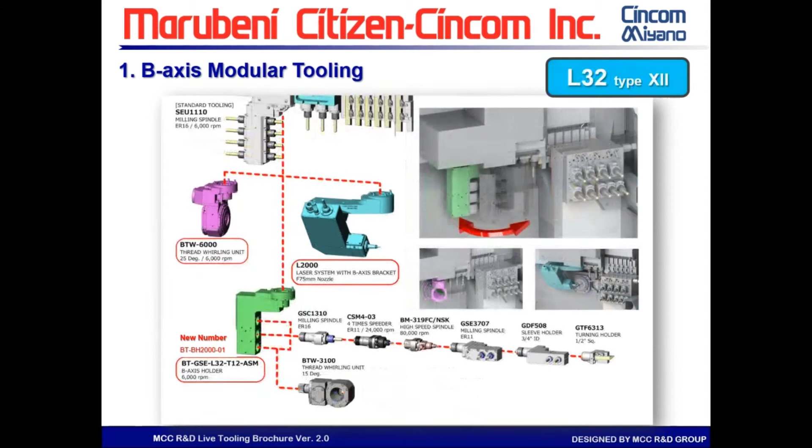This is just a good representation of some different tooling that we have, so it does not have a narration. I just wanted to let you know that your sound is working properly, and you can see some of these different tool holders that we have available. It gives you an idea, and understand that even if you come up with your own ideas for a specific tool, please work with your distributor.

They'll work with our designers, and we can make whatever you might dream up. We've done double holders, front and back, angled tools, all different electric spindles having to do with our own spindles specifically made for us from NSK. Many different versions of holders take ideas from customers, and then we start to make them.

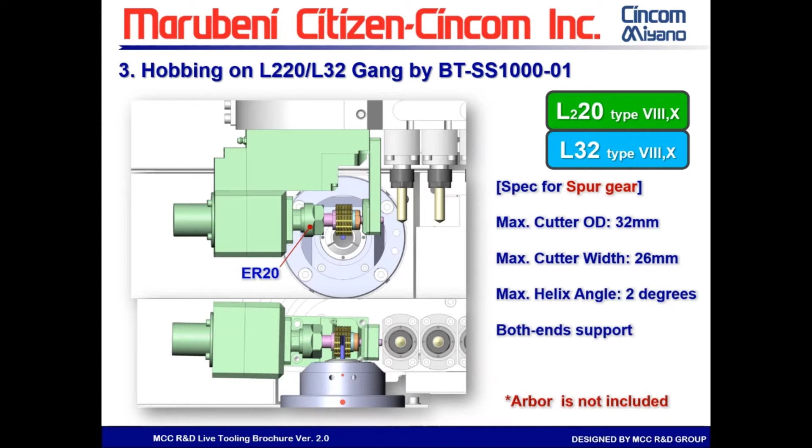A huge one is the hobbing, shown here. Many years ago, we would get hobbing holders out of Japan, and it was quite expensive because we didn't sell very many. So our designers here in the United States found ways to take the same holder we use for other features and multiple-use it. Use it for hobbing, use it for milling, use it for the back spindle of another machine. So we were able to get multiple uses out of it, and it brought the cost down.

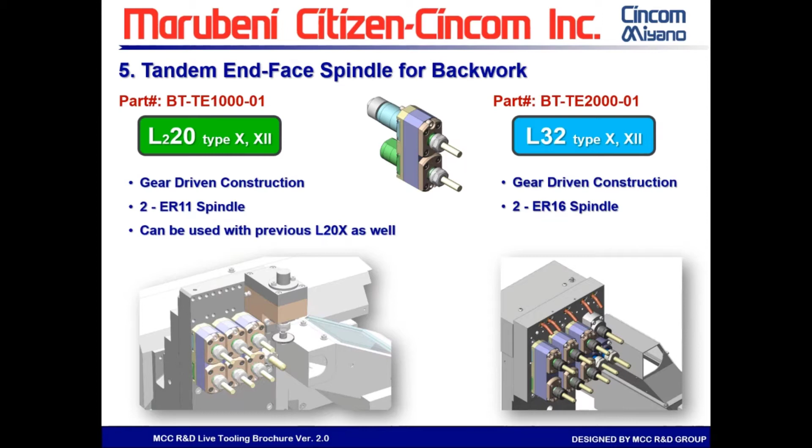And so some of our different hobbing options, we have many. Here's another great tool that one of our customers needed, and it lets us double the live tool capacity in the backside of an L20 or an L220 or an L32. We have two versions, one for the L32 and one for the L20. So it's a tandem live tool that we slide in, and it's powered from the top row, but then it subsequently gears down, and what used to be static on the bottom is now another live spindle. As many as 4 of those for 8 tools.

And the L32 can have 6, or 3 pockets.

Now here's a presentation of our hobbing spindle from one of our distributors, Spinetti Machinery.

Welcome to Spinetti Machinery. We are a very focused distributor concentrating on Marubeni, Citizen-Cincom, CNC Swiss, Citizen Miyano CNC lathes, and FOBA laser markers. We pride ourselves in representing the finest equipment in their categories, attention to detail, and providing the highest level of service for our customers. The turnkey project we did for this customer is one of many examples of that.

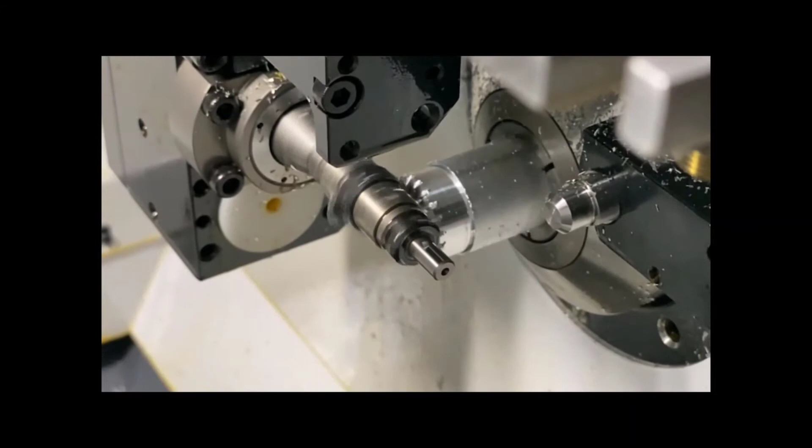The goal of the project was to successfully make a pair of identical bevel gears to mate together in a housing designed by the customer. Originally, the customer was making a single gear in 5 operations, whereas we are now making the gear in 1 complete operation.

This project is this beveled gear, which is not a common thing to do on a screw machine. This particular beveled gear, instead of being at a 90 degree, it is at a 57 degree, which is even more unusual to run on a screw machine.

This particular beveled gear required us to use this 3-tooth cutter, which acts more like a single tooth cutter than the normal cutter that we would use for a spur gear.

We also 3D printed this particular fixture to hold the 3D printed gears we made of their printed part so that we could get a better understanding in the very beginning of this project.

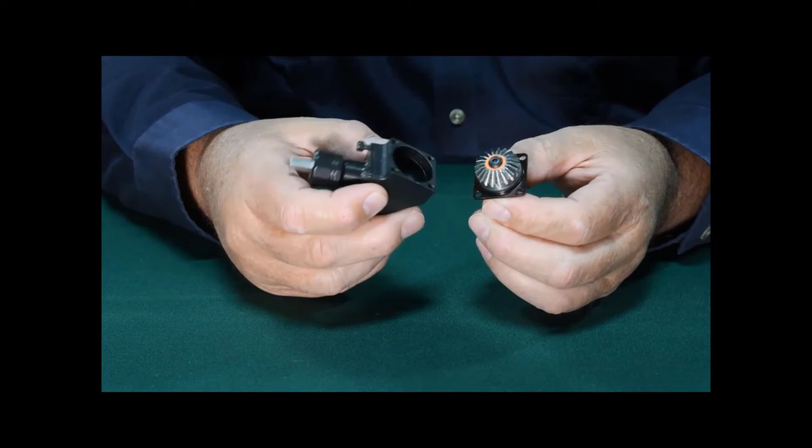The customer's actual unit that they're doing this in is this one here, where you have 2 of these side holders that hold the gear that then fit into the housing, whereas then the beveled gears will drive each other.

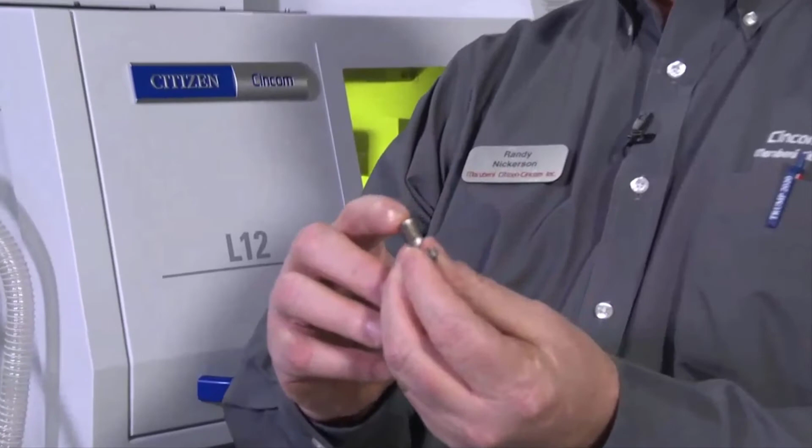The part that we're going to show you here running has a 2-piece construction, so it runs one part and then the other. One piece is a stent-like feature that cuts 385 little diamonds in that part, and then on the backside it turns a diameter. The other part is doing a tulip-like shape with the same stent-like cut, but fewer of them. On the backside, it's using milling interpolation to mill 4 little posts. When it's all done, they just fit nicely together to give us one little assembly.

Again, I can run the cycle here. You can see it processing through. As you can see, when the machine is running normally with the tinted window and we have to use coolant, it gets very tough to see what's going on in the machine.

Right now it is drilling using an LFV function, so it is really controlling the size of the chip, so I don't have chips building up on my drill. Once that's done, the laser will come in to start doing its cuts. I'll shut the coolant off so you can see a little bit.

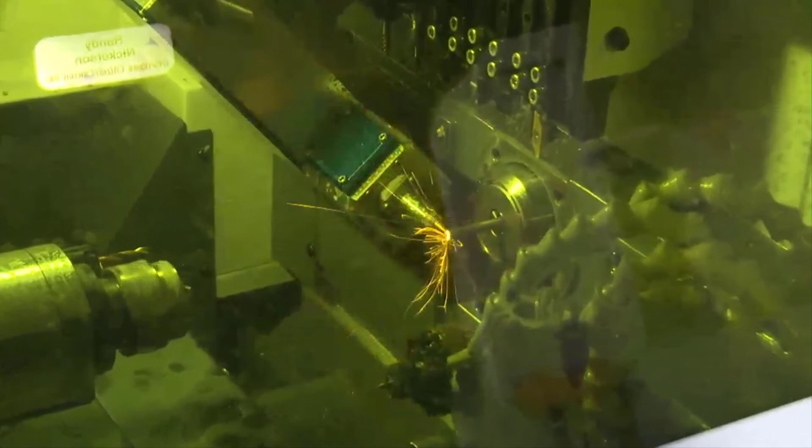It's going to do those little tulip cuts very quickly, and then start the little stents. Those stents are cutting at 55 inches a minute. Very quick motion, as you can see when it's going through here. We typically use the coolant when it's running. The laser gas pressure just blows the coolant out of the way, so it does not interfere with the cut. Without the coolant on, you could get a little bit of discoloration in the part.

Now we're going to show you a video in a few seconds of this part running without coolant, so you can see the laser working without the coolant blocking your view. Once that's completed, we'll answer any questions you might have.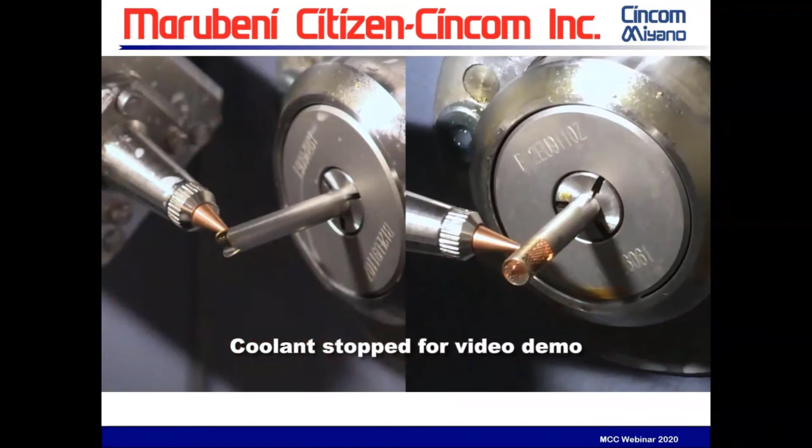Next, the laser is cutting first a tulip-like shape, followed by diamond stent-like shapes. We use the IPG fiber lasers within our system, which are available in many power levels. This allows us to choose the one that will give you the depth of cut needed while also maintaining the width of cut or kerf range that will meet your requirements.

We are also able to do laser welding with the system using the same cutting head. Our system was designed so that those needed changes are just program commands, not physical changes that would require a second laser head. As we focus back, you see that the required work on the back end of the part

is simultaneously performed during the laser or any other front end work that is required. On the back side, we are using one of the many standard control features, milling interpolation, to generate 4 posts on the back face. As a note, we are simultaneously using milling interpolation on the back and cylindrical interpolation on the front. This is due to the powerful Mitsubishi control of this Cincom L12.

You may notice how fast the synchronized movements are happening while cutting the small diamond shapes at 55 inches a minute.

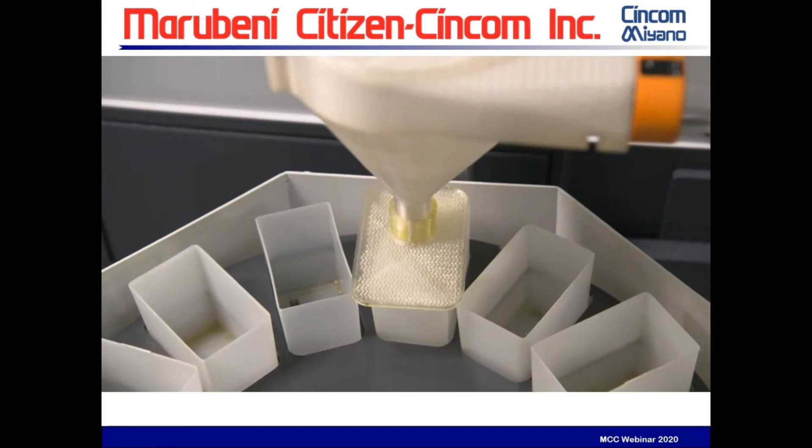Here you see our optional vacuum ejection system. This is especially useful on small or delicate parts. We are also using the optional part carousel to collect the parts. This could be used to separate your inspection parts from your production parts for SPC, or to keep soft parts from damaging each other during ejection. This tray can be configured to fit your part size requirements.

Now you see the operator panel and screen display while the program is in process. The split screen shows both channels as they run. Although it appears as two programs, it is one CNC program, but displayed like this for ease of following or understanding what is happening on each side.

Very friendly user control. You see the additional monitor of the laser control system here, which displays the laser as it is functioning, and also a camera view of the beam as it is cutting, welding, or etching on the part. All the laser commands are being sent to the system from the CNC part program.

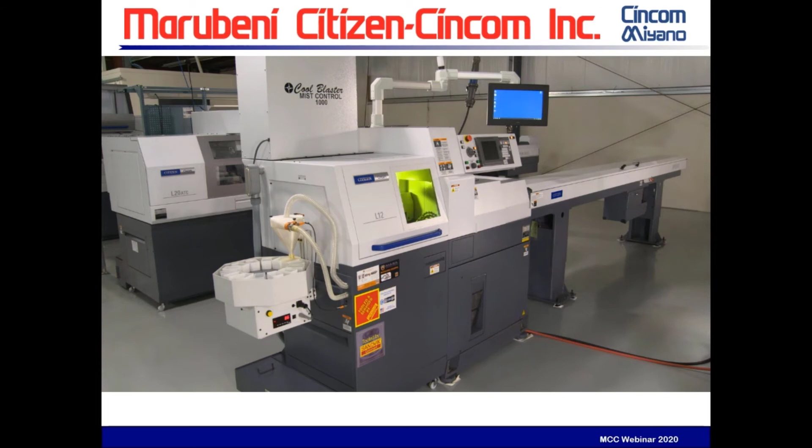We are utilizing the Citizen CAV-12 magazine bar loader, which can handle 2mm to 12mm size stock. The bar loader is interfaced with our Mitsubishi controls so well that we can see or check where the end of bar is located from the program. This is possible because the bar pusher has become an additional axis that can be seen and or commanded from the CNC part program. This is a very powerful combination.

Our laser system L2000 is also available in many Cincom models, and also the Miyano 42mm BNA 42 GTY.